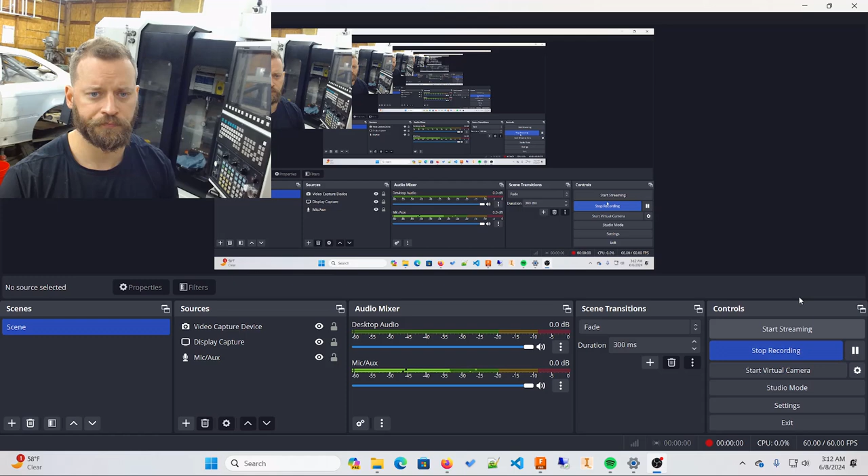Figured I'd make a little video talking through some of the design principles that I worked through on the development of this removable tool setter mount that I built for the X7 here. There's a lot of companies that make this stuff, and I'm not claiming to reinvent the wheel or anything. I found value in it as a design exercise as well as a manufacturing one. So I thought it would be a fun challenge to see if I could make something to suit this need here.

Titans of CNC came out with a video a little while back for their X7, developing their own removable mount. Reason being is when you have a machine with limited X travel, like the X7 behind me only has around 16 inches of X travel, which isn't a whole lot. And when you want to fit, in my case, two 6-inch vises as well as a fourth axis that I'm shoehorning into that space, I want to have some flexibility.

The tool setter is almost always in the way, and it makes sense to have the ability to remove it from the table when it's not needed, and to get it out of the way of larger pieces of work and different setups that you might be doing. So that was the main motivation for it. Something I've been thinking about for a little while, but seeing their video got the juices flowing and inspired me to commit and get at least a working prototype fleshed out and machined.

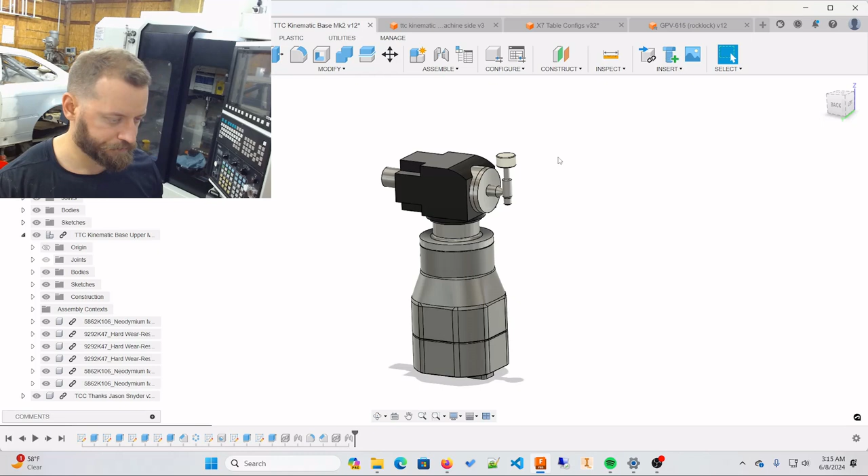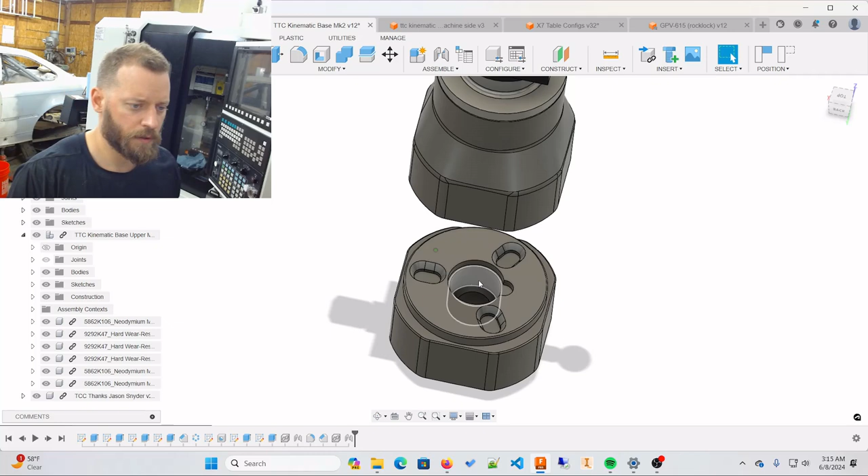So here's the model of it. Nothing earth-shattering. It consists of the tool setter itself, an upper half and a lower half. This lower half lives on the table. It's drilled and counterbored for an M12, so that gets bolted to the table and lives there forever. The upper half is bolted to the tool setter, and ideally you can remove and replace this thing with a high level of repeatability on the stylus.

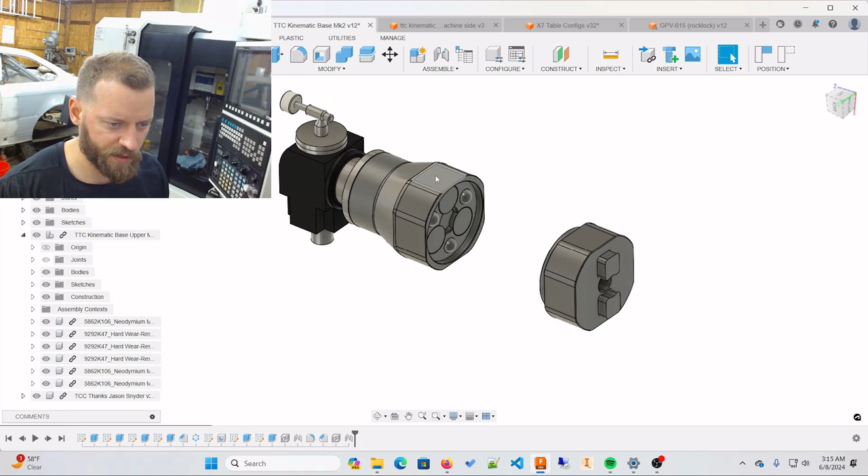So comparing their design to mine, there were three main differences. One was the mounting mechanism design and arrangement. The second was the addition of this, I guess this is more of a packaging thing, but housing everything inside of a pocket to keep coolant and chips off of it. And then the third consideration was overall height, which we'll talk through in a little bit.

Before I get too far into the first design point, the mounting mechanism, I'll bring up practicalprecision.com. If you do a Google search for Maxwell criterion kinematic mount, this isn't new technology. This has been around forever in precision machine design circles and optical systems, stuff that's really sensitive to distortion and repeatability, the whole field of precision engineering. I have a background in that. My first job out of college was designing linear stages and chasing nanometer repeatability, so I was exposed to these kinds of concerns early on in my career.

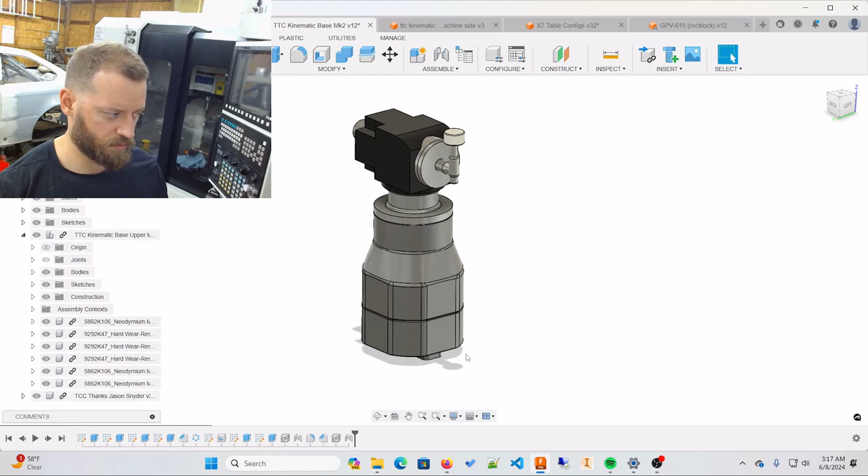So this is distilled down from all the white papers, and it's presented as a working man's copy that's readily applicable. I would encourage you to read through everything up here if you have the interest; there's some really great articles. But what it boils down to is basically 3 ball bearings located in 3 V grooves, providing a total of 6 points of contact for the system. And the reason for that is that's all you need to perfectly constrain a kinematic system.

without over-constraining it. If you add more points of contact, it's almost impossible to predict how many actual contact points you have between two surfaces instead of just points. Unless you're lapping everything in or grinding it really well, inevitably there's going to be high spots, imperfections that are going to influence your results. This particular application probably isn't that critical, but it's a design exercise. I want to make it the best I can with the knowledge I have, and that's what I went with here.

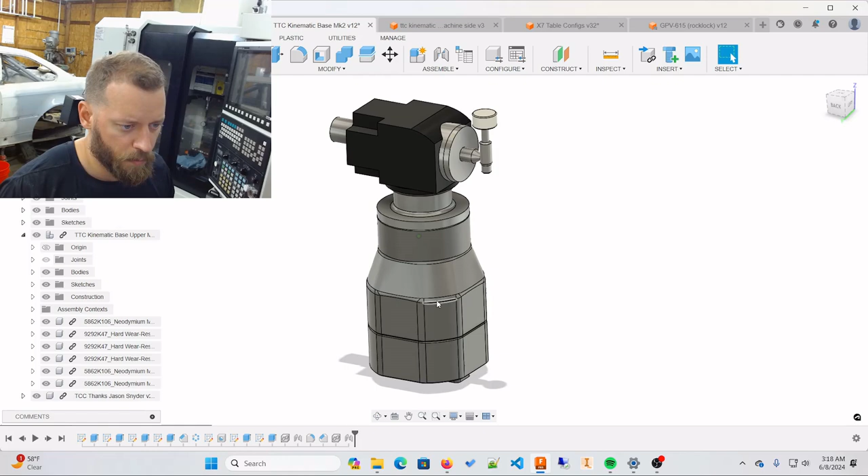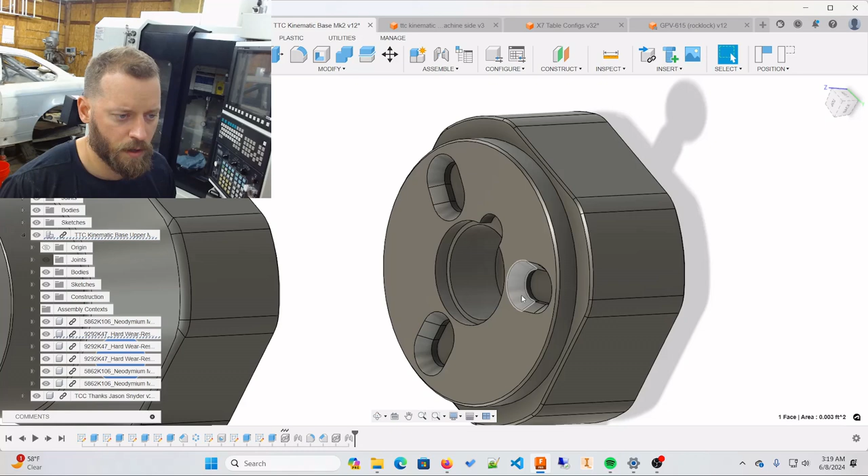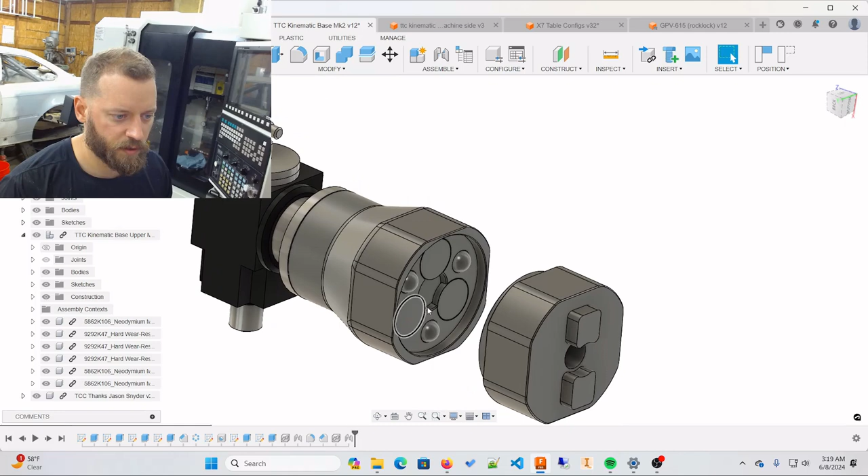But let's look at the design of the mechanism. It's really simple. There's 3 ball bearings that are press fit into the upper half of the mount, which protrude enough from this pocket to contact mating grooves that are machined into the base plate. These are 60-degree grooves, and we'll discuss that once we get into some section views. Once you perfectly constrain it in X and Y as well as rotation, the only thing you're left to contend with is vertical displacement, which is what the magnets are for. They provide the preload for the mechanism, the attractive force, to keep the ball bearings in contact with these grooves, to keep it from rolling in either direction and influencing the stylus position.

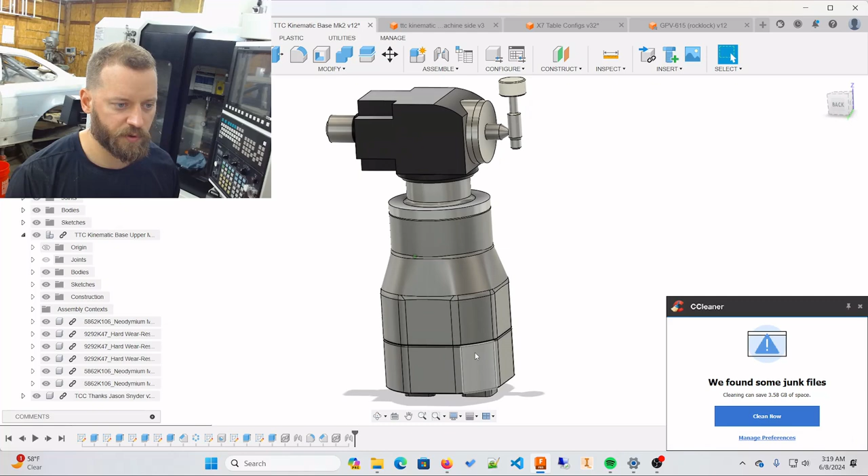Because with how far away this stylus is from the center of this joint, if there isn't enough preload or there's more compliance than what is ideal, it's going to be magnified up here, right? And this is what we care about. We want this to be accurate. When you take it off and put it back on, we want it to come back in the same position, probably within a tenth or two if possible.

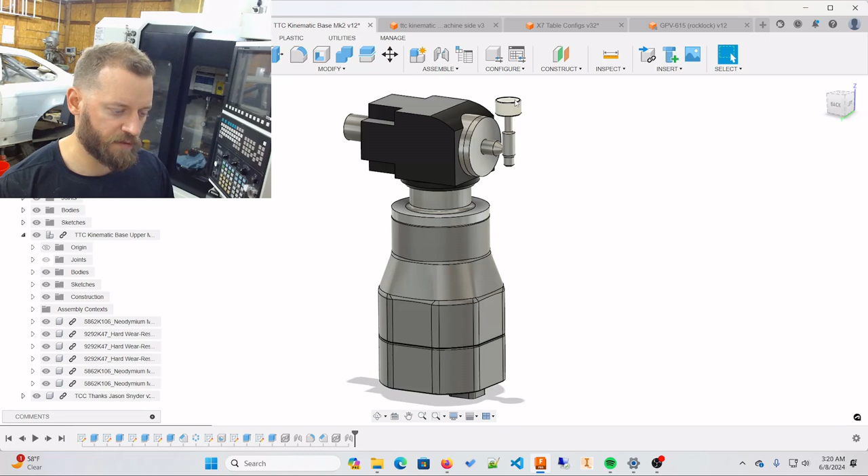So that's the mechanism. If we look at some section views, let me rotate this. So this is a shot of the ball. This is a cross section of the ball bearing in its mating V groove. There's a bunch of other discussion about this in the articles on practical precision. There's a bunch of discussion on ramp angle.

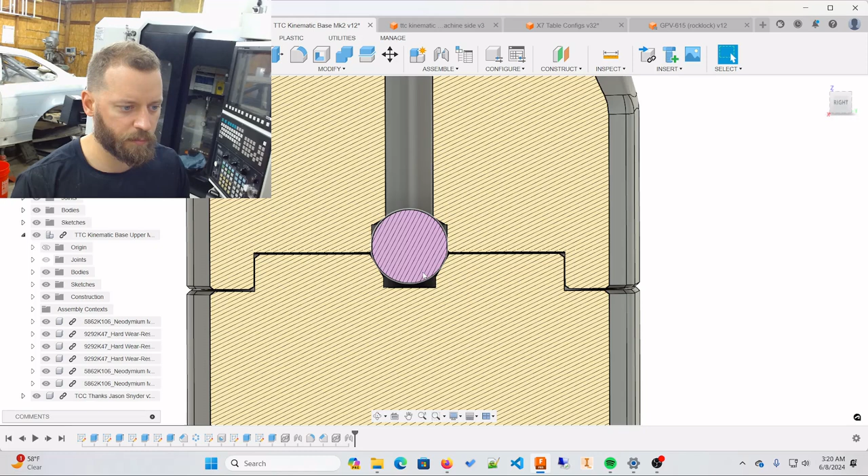Basically, the shallower the angle, the easier it is to install and remove, but the lower the moment resistance is for the upper half kind of climbing out of the pocket. And it becomes more important if you have stresses involved. So you can design the center of this mounting pattern in a few ways, right?

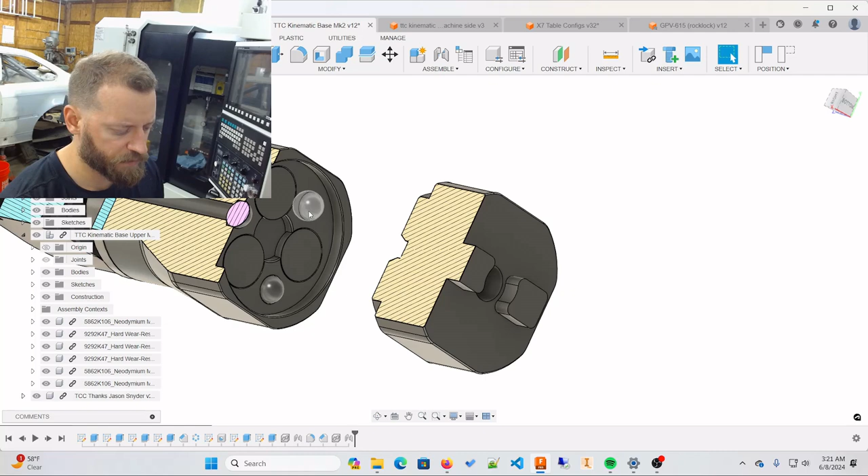If it's a static system and it's not moving, not really experiencing any kind of forces, it makes sense to do it about the center of mass, which is kind of what I did here. I didn't do any great analysis. I just kind of picked a stock size of material that I wanted to work from and that would fit my needs for where it wanted to live on the table. And I tried to maximize the footprint within those constraints. In this case, it's 2 5/8 diameter 4140 round stock that I'm machining this from.

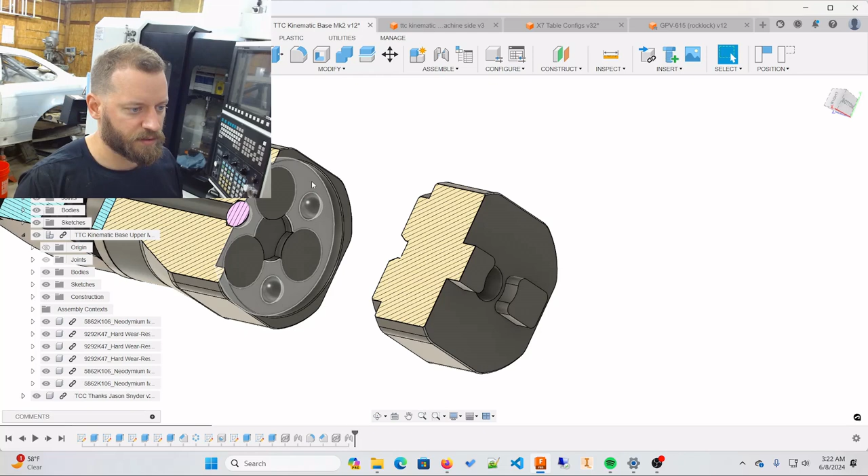If it's something that's under load, or even more complicated, if you have like thermal gradients you have to deal with, it probably makes more sense to design the center of this mechanism around the center of stiffness, which is roughly approximated by the second moment of inertia of your system. Or if it's thermal, try to figure out where the center of expansion is. So it's kind of situation dependent, but this is a relatively simple application, so I tried to keep the design simple. But back to the ramp angle that I chose.

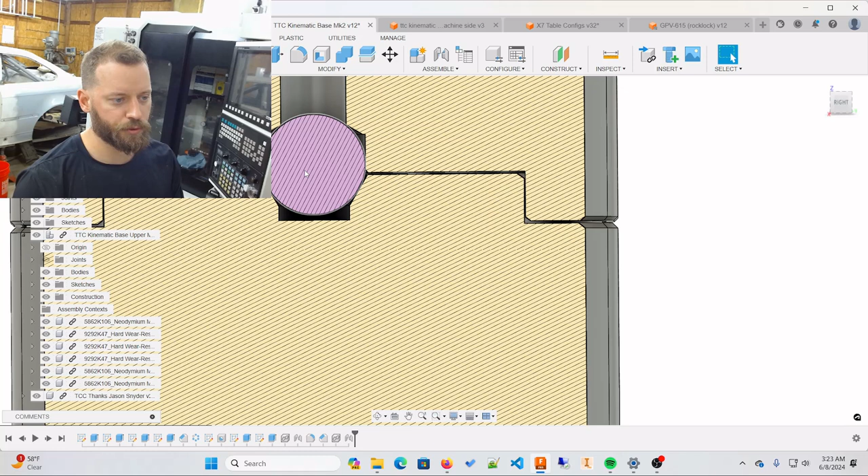So I went with 60 degrees, mainly because as you increase this ramp angle, think of it as climbing up a hill. If you have forces applied that would want to roll this upper half off of the base plate, in one direction or another, not that we do, it would be a lot harder for the ball to roll out on a steep surface than it would be a shallower one. It's like climbing a hill. You know, shallower grades are a lot easier to walk up.

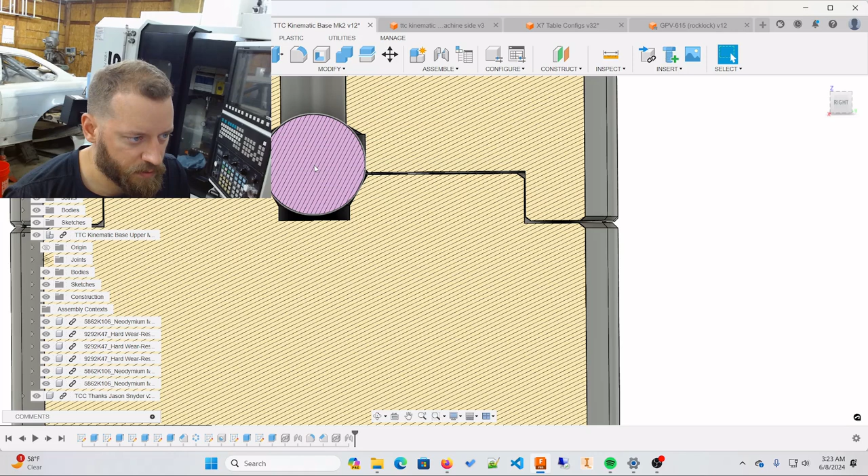Same principle. The other thing I liked about this was, and I don't have any calculations to back this up, it just made my brain feel fuzzy and warm. The center of the ball, of the component that's defining the position for this entire system, is a lot closer to the center of this joint. So if you draw a line between the points of contact on this ball bearing and strike your center line, the center of the actual ball bearing is a lot closer to that than it would be if you had a 45-degree groove and this thing was sitting up a lot higher. So that gave me the warm and fuzzies. I don't know if it actually means anything, but that's what I went with.

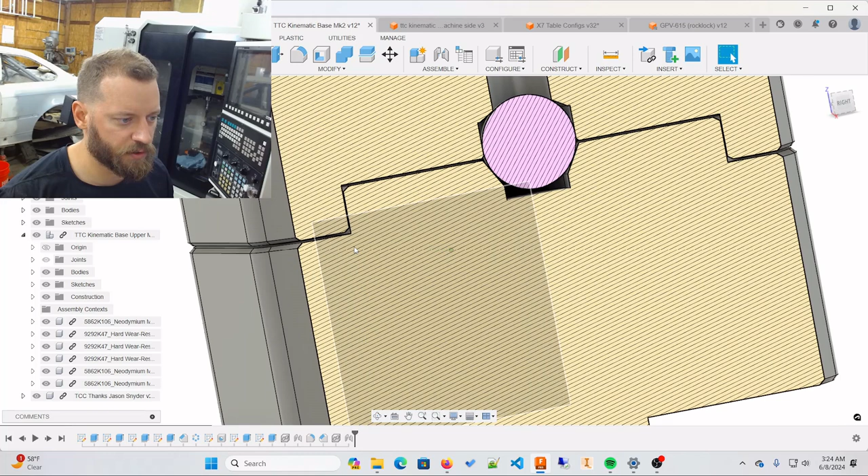Design point 2, which you can also see here. So all this stuff is housed in a pocket on the underside of the mount, right? And when you mate it down, if you have this on the table, you want to be able to shield it from chips and coolant getting in here, because if you're cutting anything magnetic, inevitably it's going to wind up on your magnets, which is going to negatively impact the repeatability or the dependability of this thing.

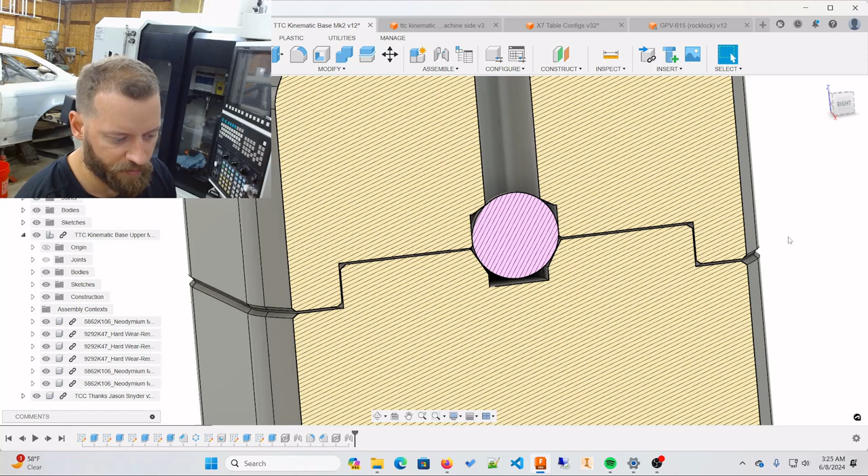You don't want to have to take great care to keep this thing clean, or even worse, do cleaning activities every time you want to put it back on. I mean, you should inspect it at least, but you don't want to have to do a bunch of rework. If you can design your way out of a situation, it's often much better than having to remediate it with a bunch of processes after it's already happened, right? So that was the idea behind incorporating this labyrinth seal.

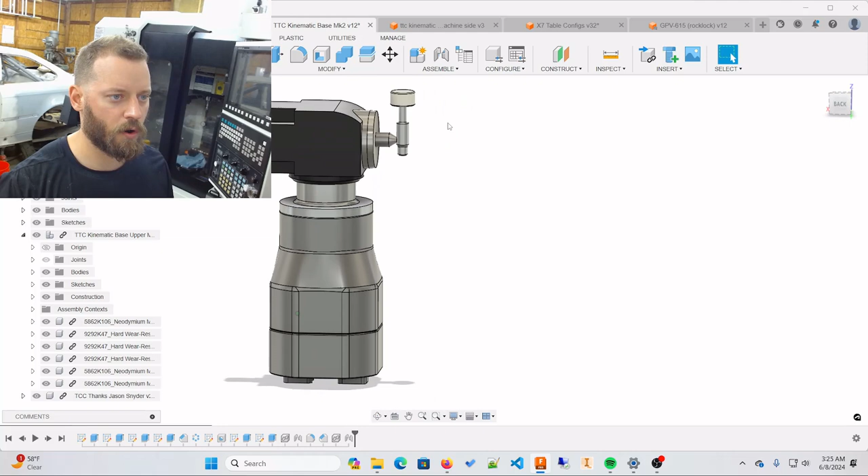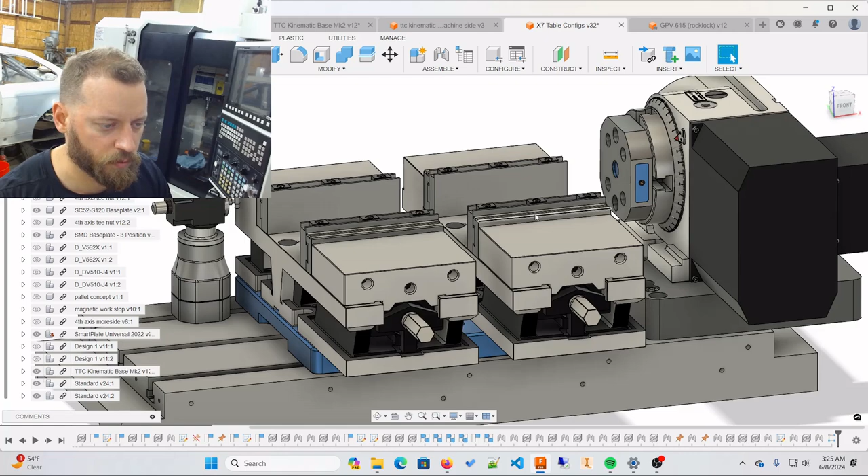So finally, the third consideration was overall height, and this might look a little tall, but let me bring up my table configuration, and this is what we're working with. The X7 table. Kind of my default setup, I'll probably have two 6-inch vises on here mounted to a subplate, op 1 for roughing in one vise, and then soft jaws to finish a part off in op 2, just to try and make me a little bit more efficient instead of having to reorient everything twice the number of times.

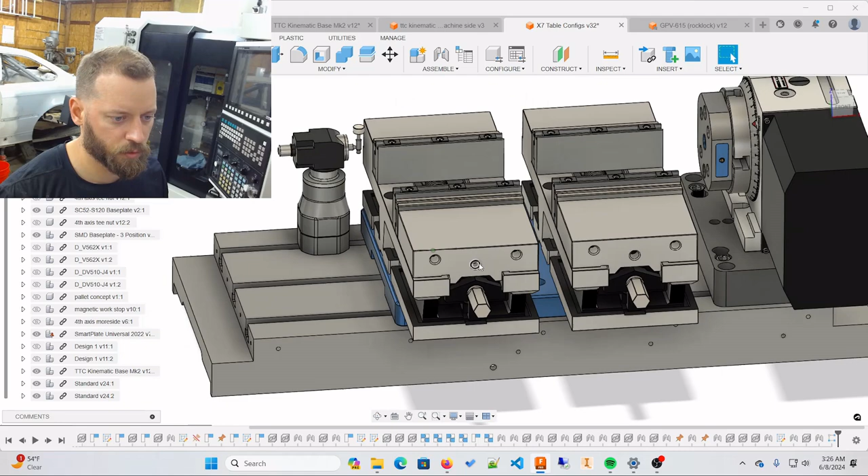So my plan is to mount these vises to their own subplate, which kind of functions as a poor man's 0-point system. It's a 3-position subplate, and the vises I have, these are from Glacier Machine Tools. They're pre-drilled on the bottom with a 96mm square pattern for use with like a 5th axis style pull stud.

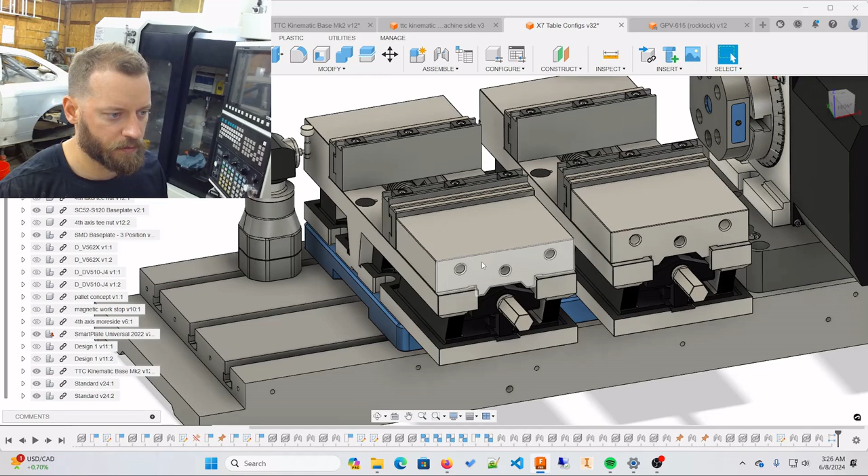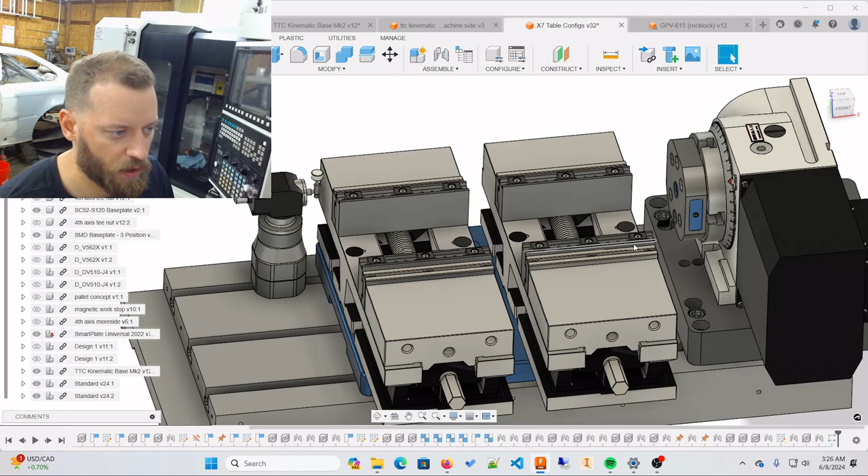So I can install my own locating studs to screw in, and then instead of having the clamp screw, I'll just utilize the bolts on top to bolt them in place. So I didn't see a whole bunch of difference between undoing 2 screws versus 1. It wasn't worth spending thousands of dollars on, at least not at the point where I'm at here, just getting started.

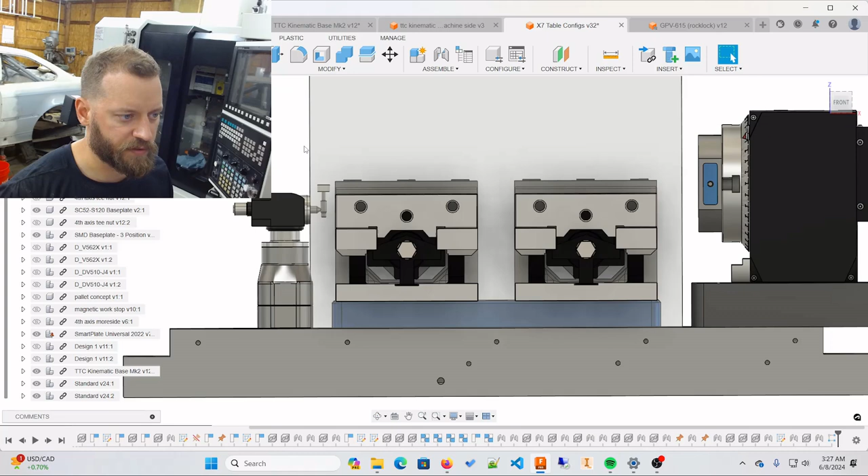But back to the tool setter. So this thing obviously needs to live within the machining volume of the machine. Yeah, it's kind of a stupid phrase. This translucent box represents my machining volume. So left edge is my X negative limit, the right hand edge is the X plus limit. So this stylus obviously needs to live in here somewhere. This allows me to perform recalibrations if I need to, which is probably good preventative maintenance.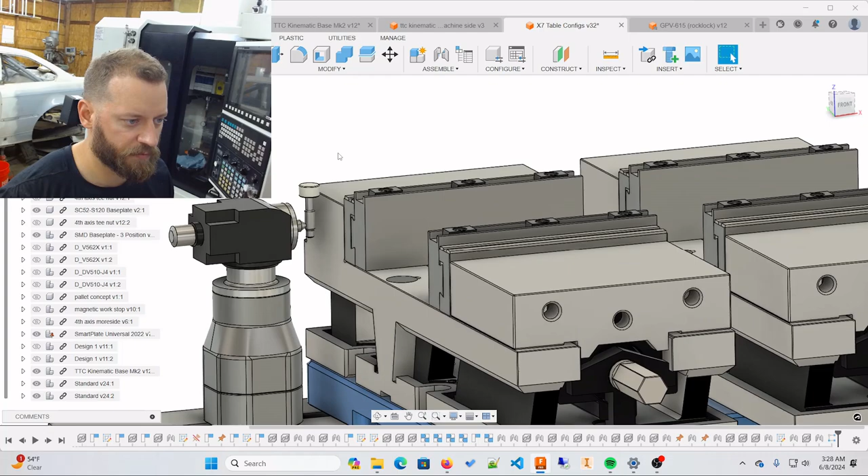The other consideration, well, I guess the final consideration is height. So I positioned the stylus above the fixed jaw of the vise. Calibration was one aspect of this. The other aspect is if I have to touch off a face mill or something larger in diameter, I need clearance in order to do that because it's not centered on the stylus when you touch those off. So I have this whole area here available for that purpose.

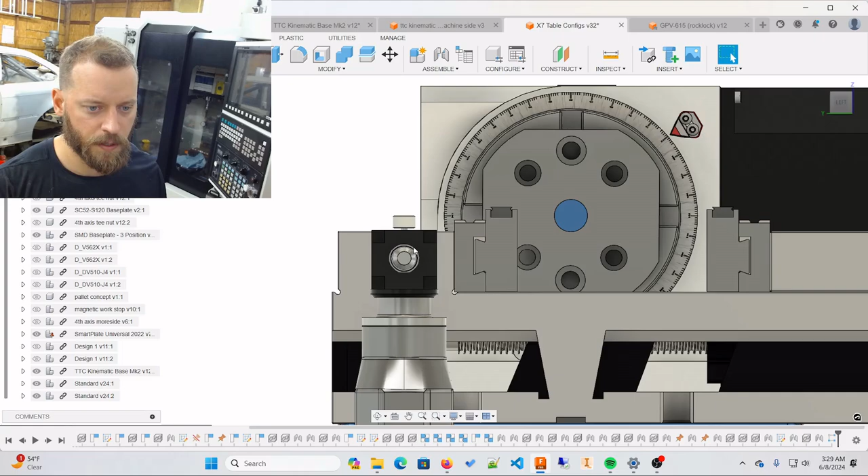And if we take a look at an end view, where I'm drawing my mouse, this is a conventional vise, so this fixed jaw never moves. Where I'm drawing my cursor here, that's going to be my maximum threshold for where the material is going to impede on the tool setter when it lives on the machine. So in theory, I think this placement is going to work out good for a lot of different setups.

Most of the tools I use are 3 inches or longer, so this also gives me greater spindle clearance between the nose of my spindle and the top of my vise or any work that I have clamped up in here. So I don't have to worry if I break a tool, I can put the tool setter back on and not have to tear my setup down or do a bunch of stupid stuff to try to retouch off my tool. Kind of defeats the purpose of having a tool setter if it's difficult or inconvenient to use.

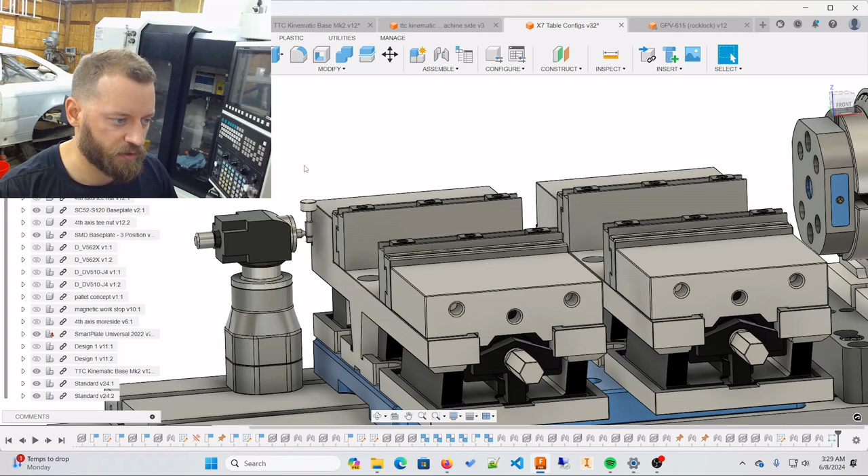And this kind of dovetails into a broader conversation on what I'm trying to do, right? At this point I'm just starting out, I'm doing job shop work, or at least trying to. I don't have a niche yet. So I need to be adaptable, and while I'm doing that, I'm doing my own product design in the background, which requires some incubation to flesh that out. So in the meantime, I'm doing job shop work, and there's a ton of really valuable lessons to learn by doing that, even if it isn't the most glamorous or the most lucrative.

Especially for somebody new starting out, such as myself, from programming, from tool selection, from fixturing, there's a million different things to learn, and there's a new challenge every time. So if you get good at that, it really strengthens your creativity and your problem solving and your efficiency as well, right? So I think that's really valuable to do, and that's what I'm trying to work through with this. It's why I want it to be as adaptable as I can.

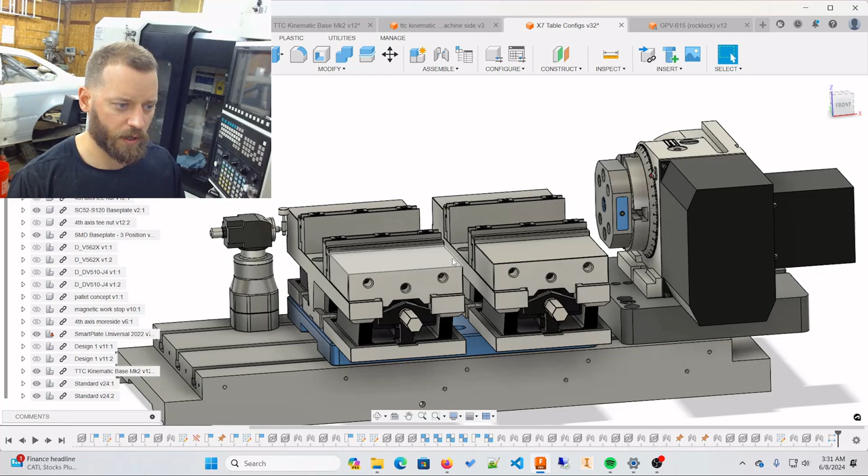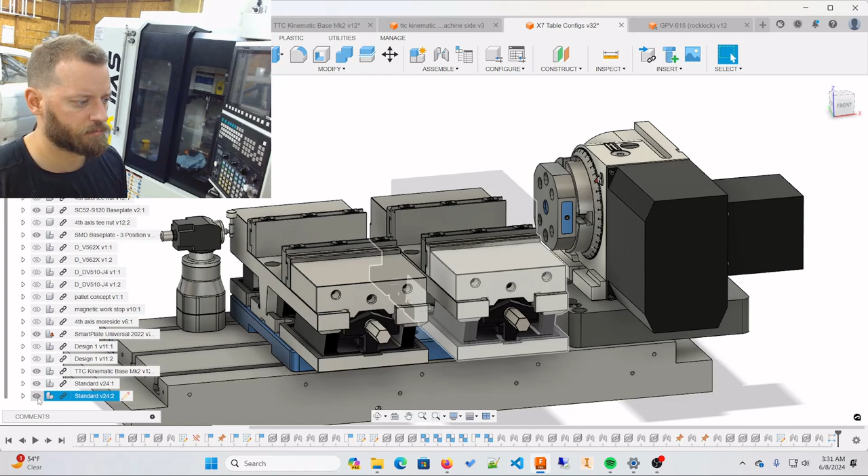I got my 2 vises here, which are going to be kind of like my default setup. I have the 4th axis. This is mounted to a Saunders SmartPlate. I got this 0-point plate on here. Say I do my op 1 in a vise, and I need to do op 2 in the 4th axis. I can do it. So I remove the 1 vise, leave this here, and then I have all this machining volume available to rotate the 4th and spin the part. Or I could remove them both and put a tombstone in.

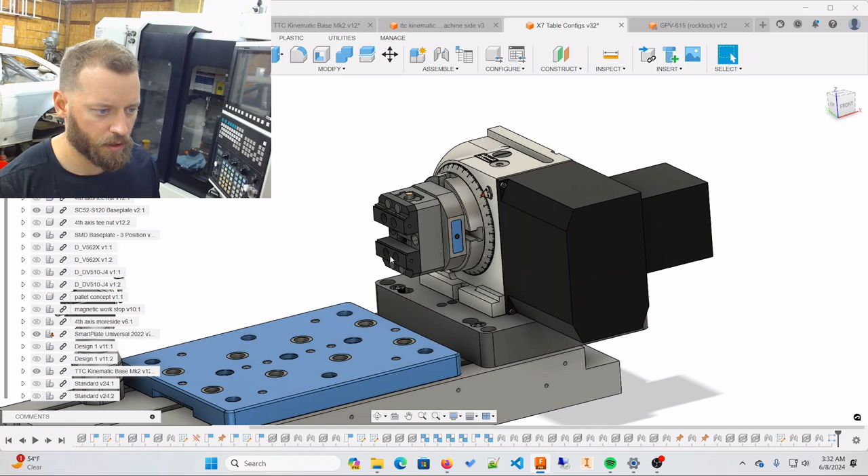But either way, this tool setter position, I need to work through it and prove this out. But I've spent a bunch of hours in Fusion thinking about this stuff and trying to analyze it. It looks like it'll work for a lot of different use cases. So that's kind of why I designed it this way.

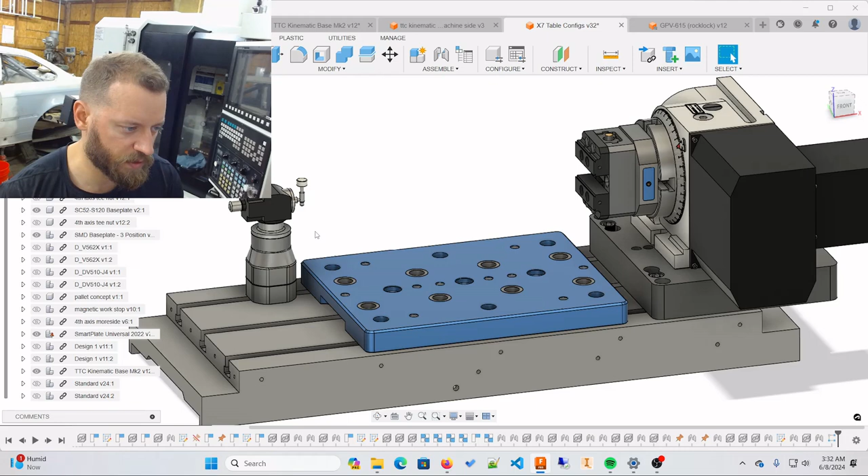I guess that's enough yapping, enough Fusion. We can go look at the actual tool setter and do some repeatability testing, and maybe some of the other challenges that I experienced through the process of trying to get this thing to work. So let's go do that.